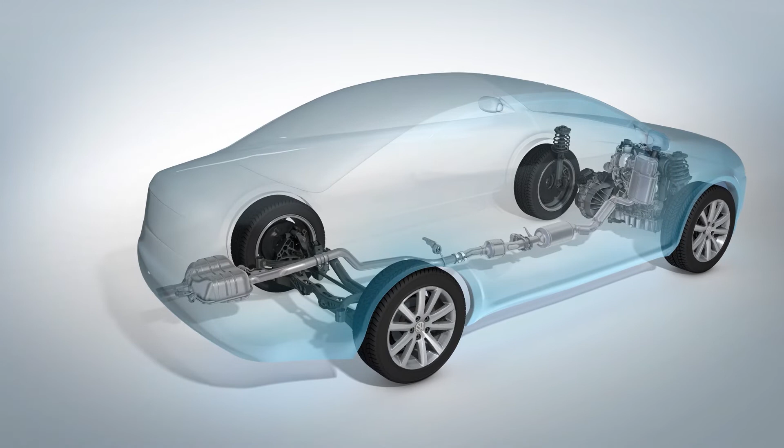A vehicle with a petrol or diesel engine burns fuel. Combustion always creates pollutants, the emissions. Legal limits apply to a number of components of the emissions. We will show you how these elements are removed from a diesel engine's exhaust gas step by step.

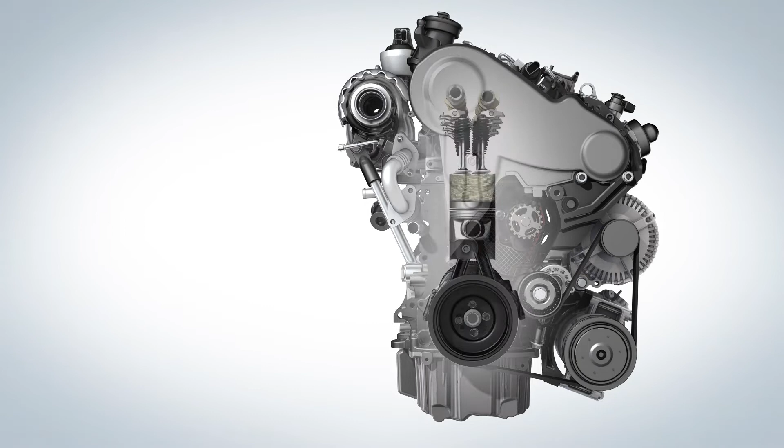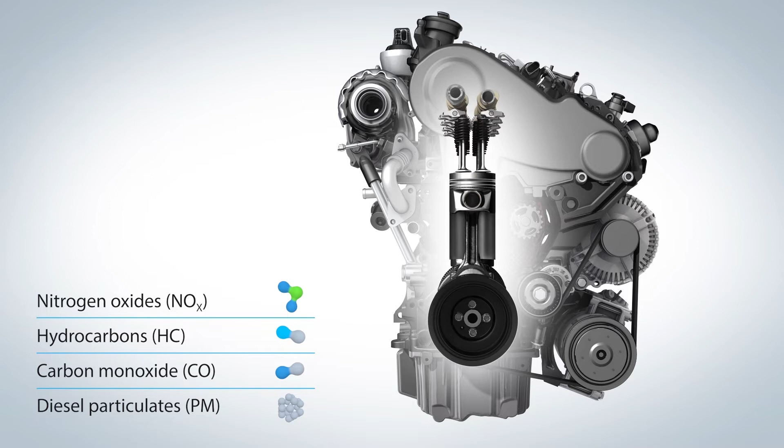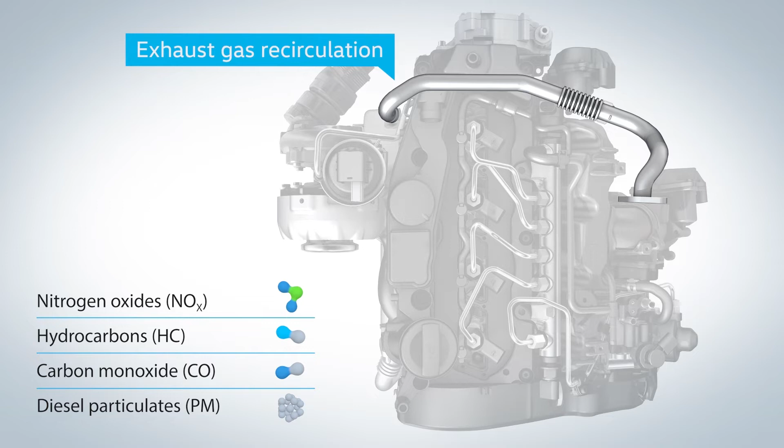The combustion takes place in the cylinder and drives the piston. Here, the emissions are generated. The nitrogen oxides, the so-called NOx, are part of the emissions. They are already minimized inside the engine. This is exactly what exhaust gas recirculation does, by feeding part of the exhaust gas back into the cylinder. This reduces the combustion temperature, giving rise to far fewer NOx.

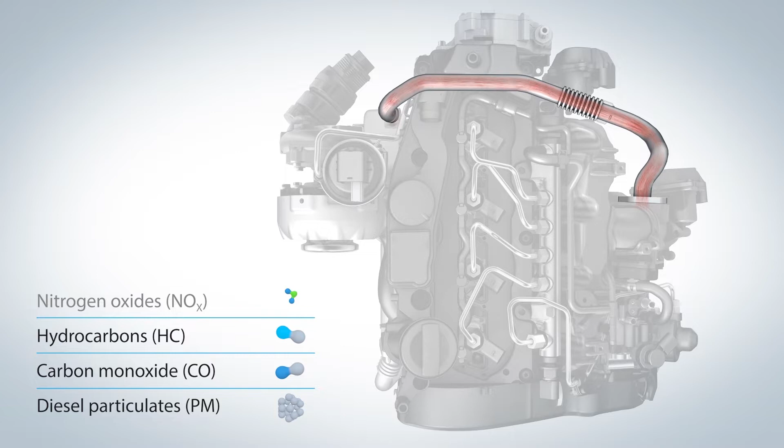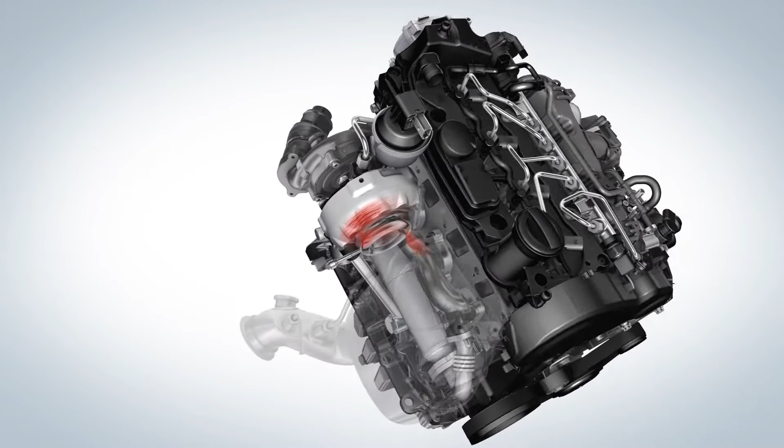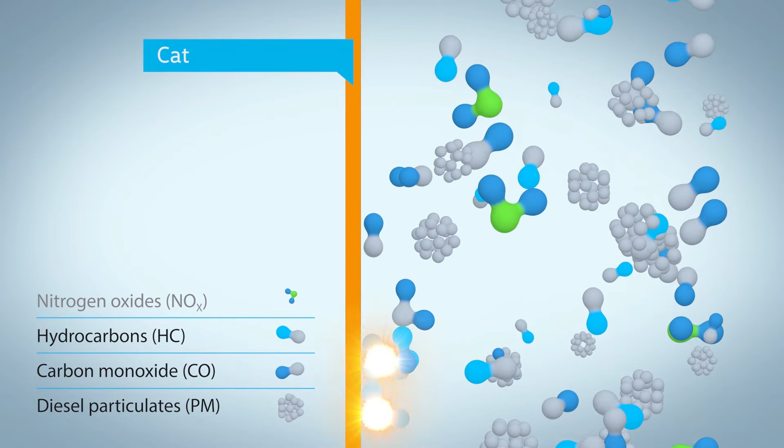After the exhaust gas has left the combustion chamber, it drives the turbocharger and moves on to the exhaust gas aftertreatment. In this compact unit, the exhaust gas encounters the oxidation catalytic converter. This converts the carbon monoxide and hydrocarbons left over after the combustion process. The products: CO2 and water.

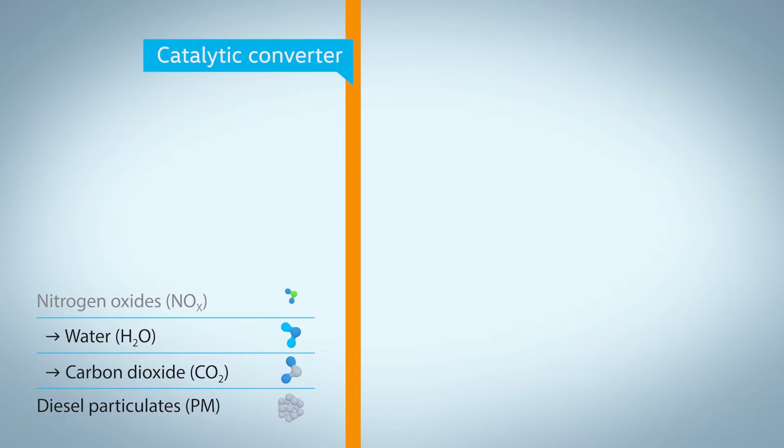In a next step, the exhaust gas reaches the diesel particulate filter, which eliminates the soot.

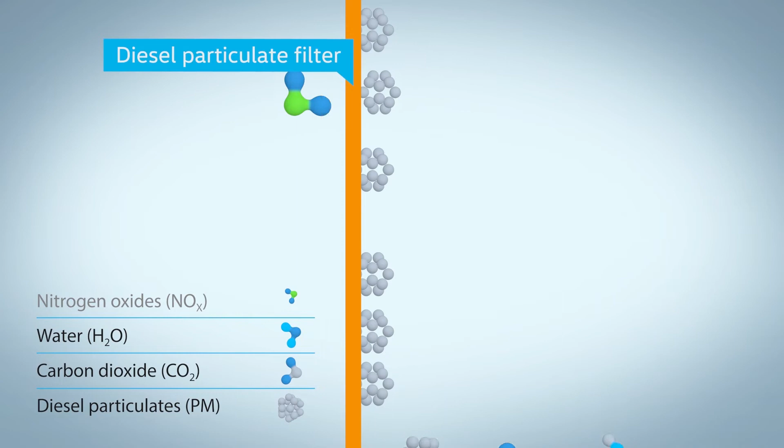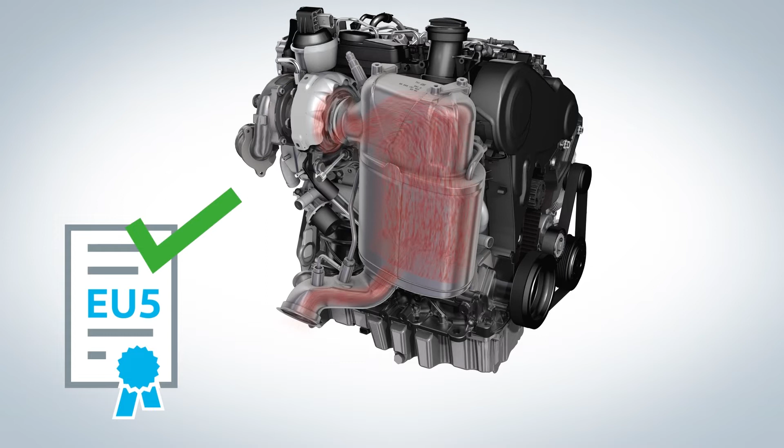The process described here reliably fulfills the exhaust limits of the former Euro 5 standard in Europe. The limits regulate both the diesel particulates and the nitrogen oxides. However, reducing them both results in a technical conflict, since with the diesel engine, a reduction of the particulate emissions automatically leads to increasing NOx emissions and vice versa.

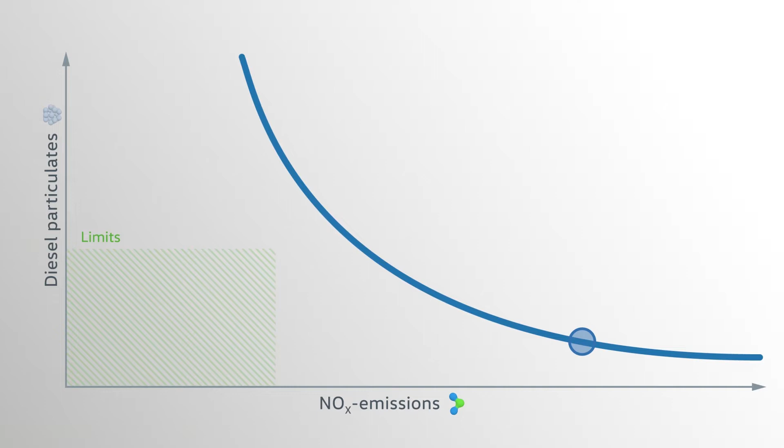Therefore, to comply with stricter NOx limits such as Tier 2 Bin 5 in North America, exhaust gas recirculation alone is insufficient to limit the NOx. The NOx have to be reduced actively.

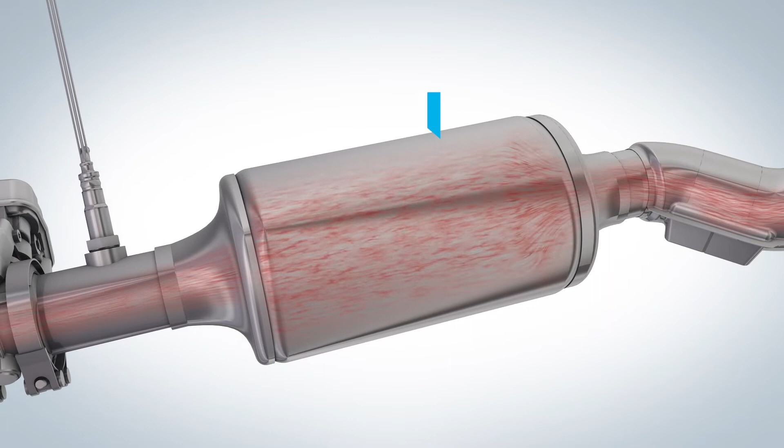There are two technologies for this exhaust gas aftertreatment. One of them is the NOx storage catalytic converter, which stores the nitrogen oxides. When it is discharged, it releases CO2 and nitrogen, as it makes up 78% of our natural atmosphere.

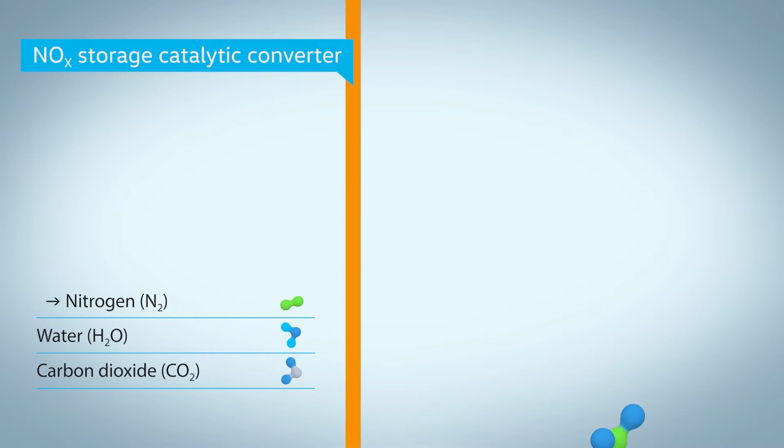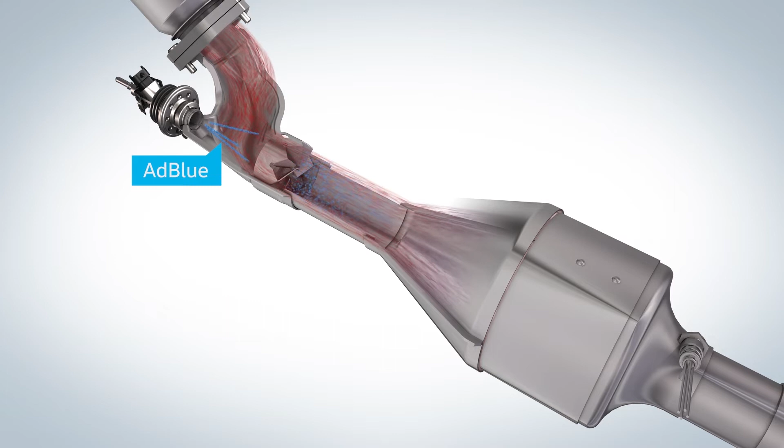Especially in larger vehicles, another technology is used, the SCR system. Here, AdBlue, a water-based urea solution, is injected into the exhaust gas. After its conversion, water and again nitrogen are generated in the SCR catalytic converter.

These technologies enable an effective elimination of diesel emissions and ensure compliance with the requirements on markets worldwide.

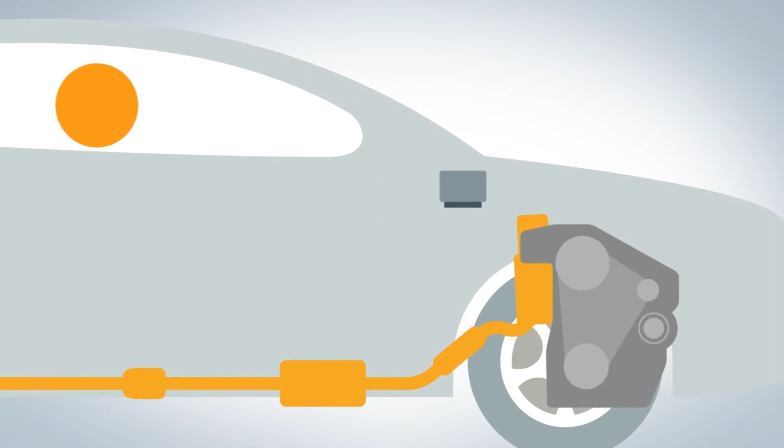An important part of a modern engine is the engine control. Its complex software processes the signals of many sensors in the vehicle and ensures that the cars offer good performance profiles with the lowest possible consumption, while complying with the required exhaust standards.

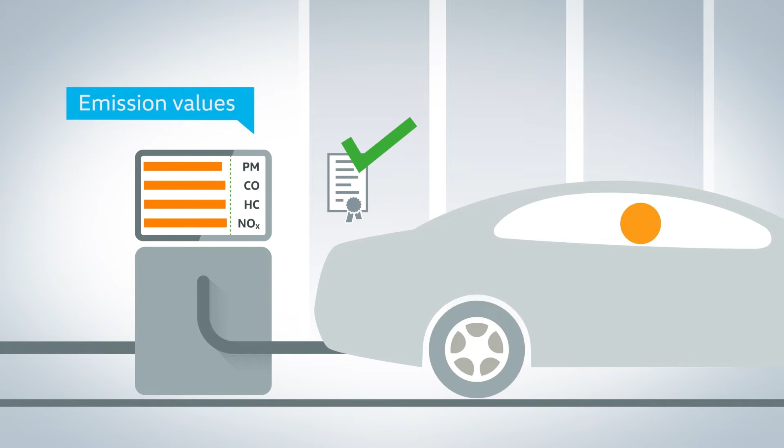Up until September 2017, testing on the test bench was the only way to determine whether a vehicle fulfilled the legal requirements. Here, the vehicle runs with a defined speed curve while the exhaust gas values are being measured. If the model fulfills the required specifications during its type approval, then every vehicle in the series is certified for this emission standard. A vehicle needs to recognize that it stands on the dynamometer, otherwise its ABS would block the drive wheels, for example.

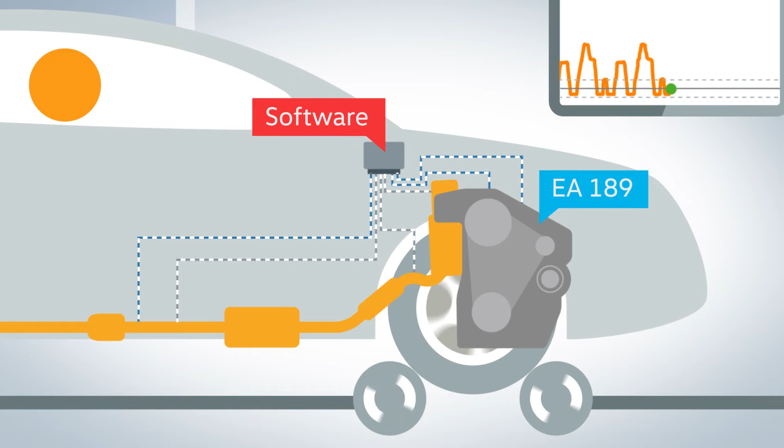Software was used in vehicles fitted with EA189 diesel engines that can detect the driving curve used in official testing. The engine control unit switches between two different modes of exhaust gas recirculation based on the driving curve detected. Mode 1 optimizes NOx values under test conditions. In contrast, Mode 2 optimizes fine particle values in use on the road.

There is compliance with threshold limits during the testing cycle. The software update no longer includes the switch.

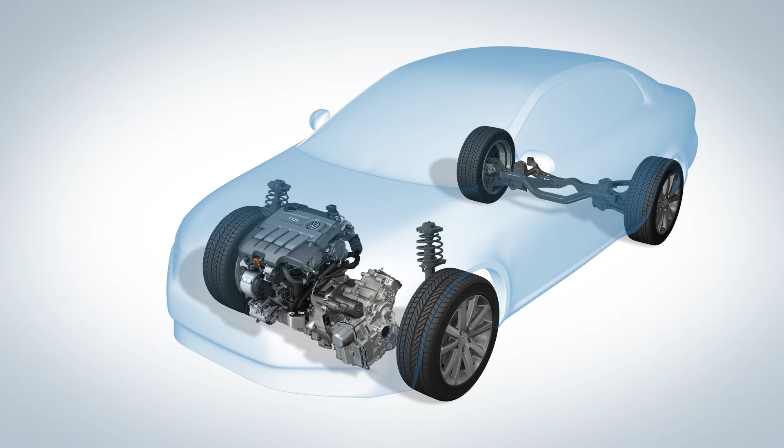We have developed technical measures. The updated engine control software eliminates the switching function that enabled the engine to switch to a particulate-optimized or NOx-optimized mode. These differ for EA189 engines in Europe, depending on the engine type.

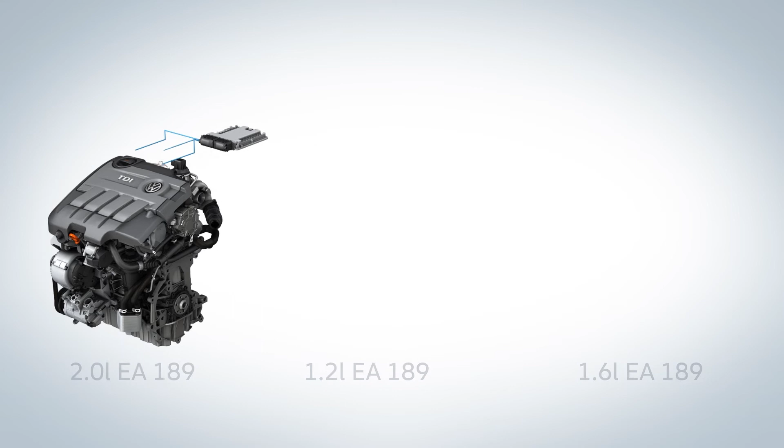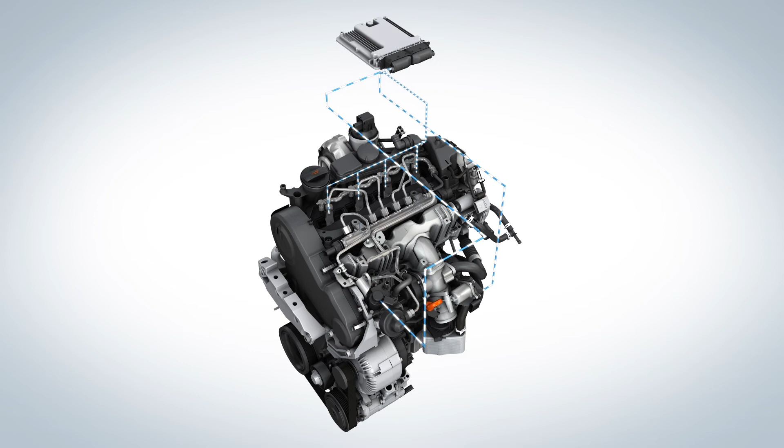All engines get a software update. The adapted software ensures that combustion is always carried out in a NOx-optimized mode. This is ensured by a modified strategy of the diesel injection and a slightly increased pressure in the injection system at partial load. In addition, the exhaust gas recirculation rate is optimally adjusted, which also ensures that nitrogen oxide test limits continue to be met.

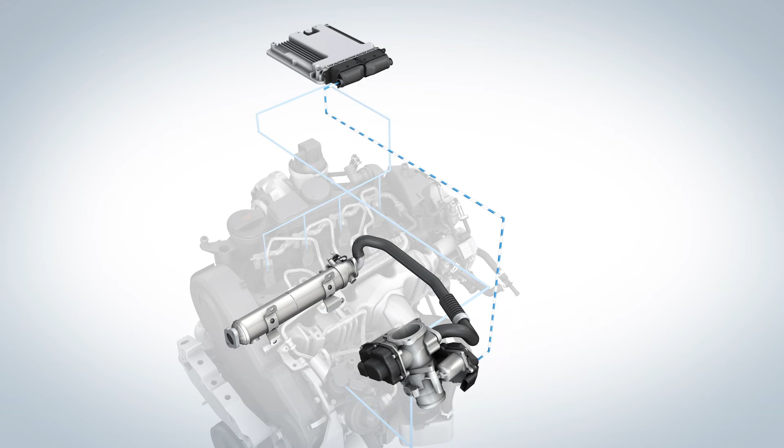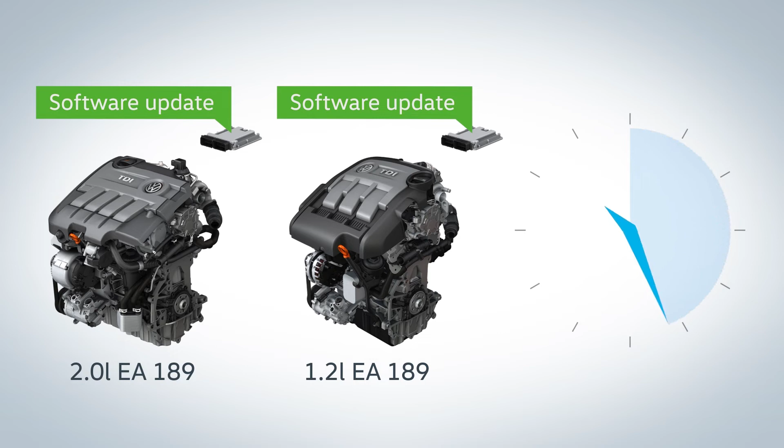The installation of the updated software for the 2.0 and 1.2-liter engines will take about 30 minutes. More specific details on timing will be confirmed to you when booking the vehicle in.

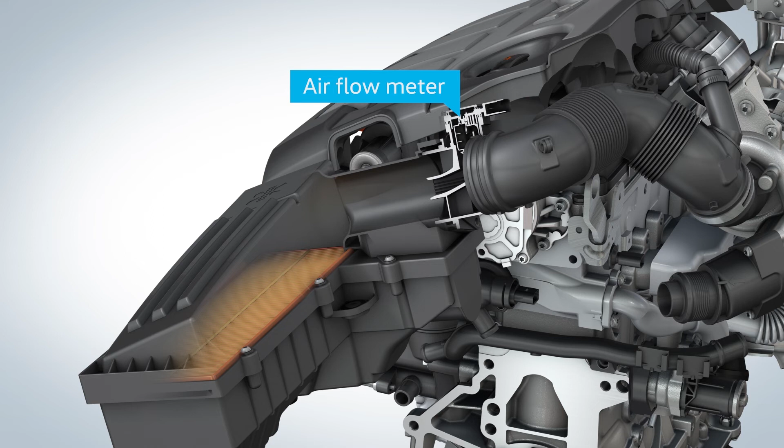For the 1.6-liter engines, the flow towards the airflow meter is additionally improved. The airflow meter determines the mass of the intake air. With this, the engine control doses the fuel quantity and regulates the exhaust gas recirculation rate.

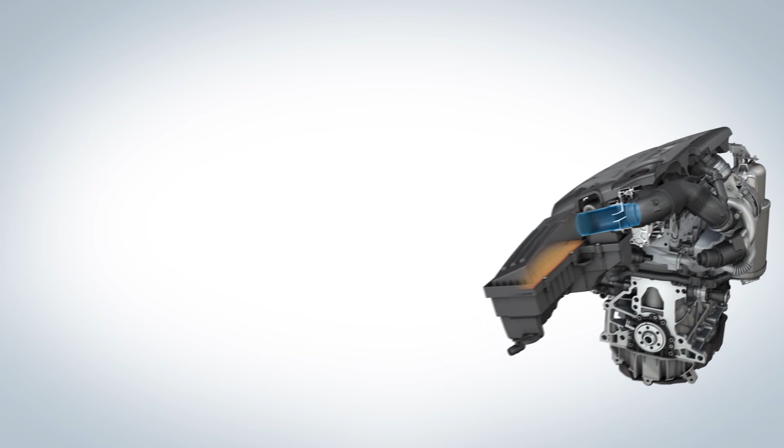The flow straightener is set into the air intake. Its grid calms the flowing air in front of the sensor, which delivers improved signals as a result. With these improved signals, the engine control can more accurately measure the mass of the intake air, and this ensures a more accurate control of the combustion.

This refitting will take approximately 1 hour. The refitting measures are currently adapted to each engine and each affected vehicle type.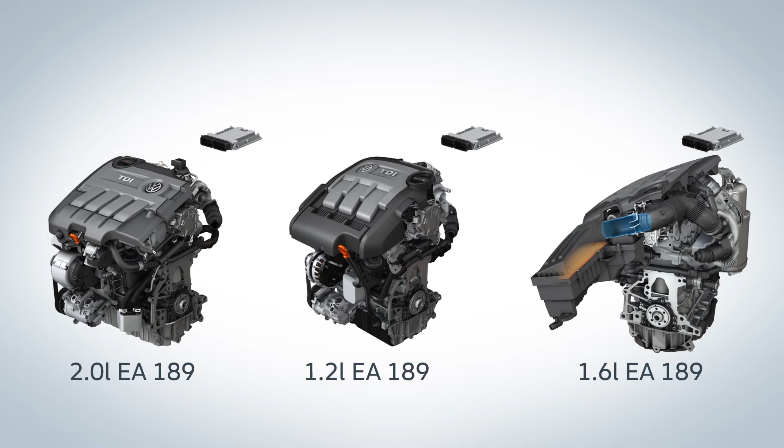All vehicles with EA189 engine type are technically safe and ready to use. The refitting process started in January 2016. We have written to our customers to inform them of the issue, and the technical measures have been installed in more than 5 million vehicles across Europe. Find more information at Volkswagen.com.

Since 2016, Volkswagen has been refitting the vehicles that are affected by the diesel issue. How does the process work for you as our customers?

Since the beginning of 2016, owners of the affected vehicles have been receiving letters from Volkswagen. We received your addresses from the responsible authorities. The letter describes the process for your specific vehicle model.

The refitting process is taking place successively, and all owners have received a second letter throughout the year. Only with this letter do we ask you in good time to arrange an appointment with an authorized Volkswagen business partner of your choice. If you wish to be informed about the further process meanwhile, please visit our website.

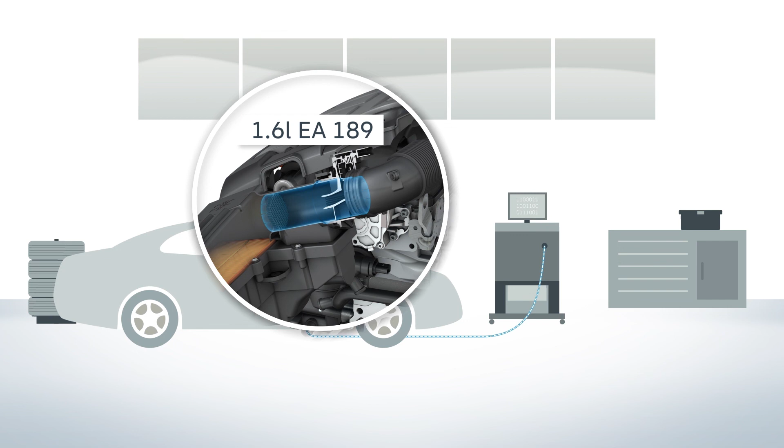The refitting in a Volkswagen workshop of your choice will take approximately between 30 and 60 minutes, depending on engine and measure. Your car will receive an update of the engine software. The 1.6-liter engine additionally gets a component, while you can enjoy a coffee in the lounge.

The implemented measure is documented by making an entry in the service book and placing a sticker in the spare wheel well. This refitting is of course free of charge for you. Find more information at Volkswagen.com.